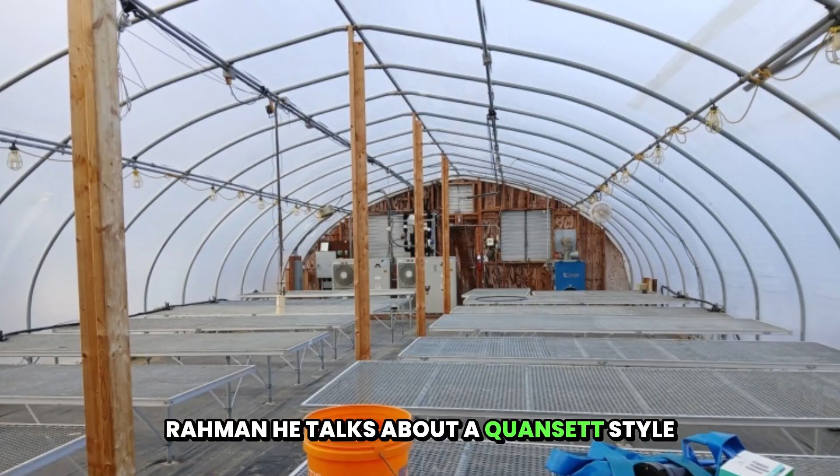In my conversation with Dr. Rahman, he talks about a Quonset-style greenhouse. He's talking about a pretty high-tech greenhouse with lots of control over the abiotic conditions, trying to maintain pretty consistent conditions, but it's a Quonset-style greenhouse, so it kind of looks like a high tunnel from the outside.

He says that he is maintaining pretty consistent temperatures for a lettuce crop, and he does talk in Celsius: 18 to 27 degrees Celsius. So here's a little memory tool for anybody who isn't used to using Celsius in their everyday life: 30s are hot, 20s are nice, 10s are cold, 0 is ice.

So if you think about that from a plant's point of view, that makes a lot of sense too, especially for a cool season crop where we're thinking about 18 to 27 degrees. That's nice, right? That's like a 70-degree day. 30s are typically too hot for these plants to grow. 10s are too cool for growth for the most part, and you will start seeing crop injury once that temperature drops below 0, once it gets too freezing.

Also want to highlight that Dr. Rahman is an engineer, so he has to do a lot of terminology code-switching when talking to plant people like us. Every once in a while he uses some terms that I, as a biologist, feel compelled to correct. But I want to give credit where credit is due—he's an engineer, he doesn't need extensive knowledge about the plants living inside of it, and most engineers don't even bother.

So we're just going to be cool about it, and I'm talking to myself here. I might flash a note on the screen when I think a clarification is necessary—specifically, he will sometimes refer to pathogenic gases when he means phytotoxic gases.

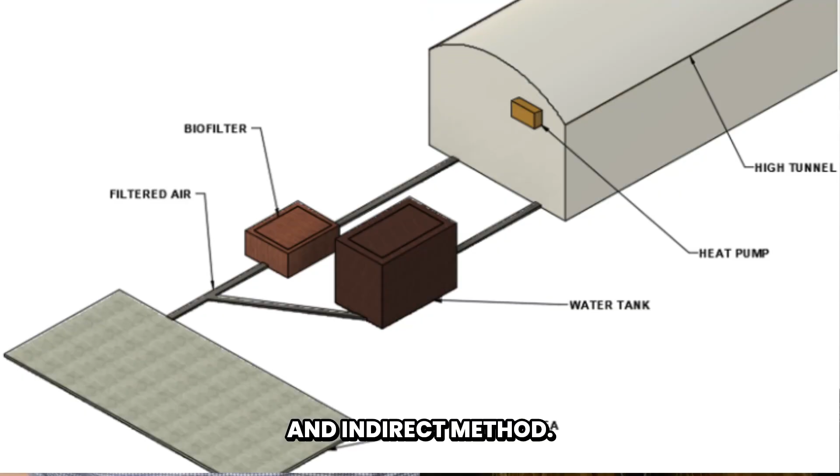Then when I and Hafizur, my student, were working together to find a way to transfer heat from that manure stockpile to the greenhouse, we were thinking of both direct and indirect methods. Fortunately, that high tunnel already has an embedded heat pump to provide indirect heat to the high tunnels from those compost bays or manure aerobic digestion systems.

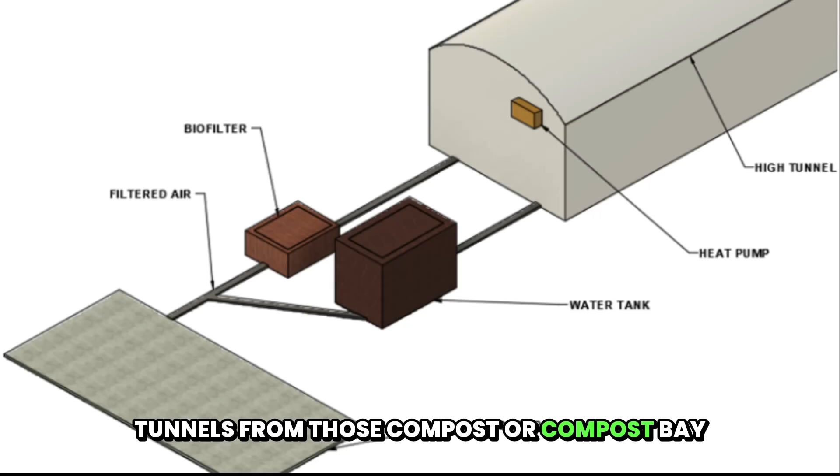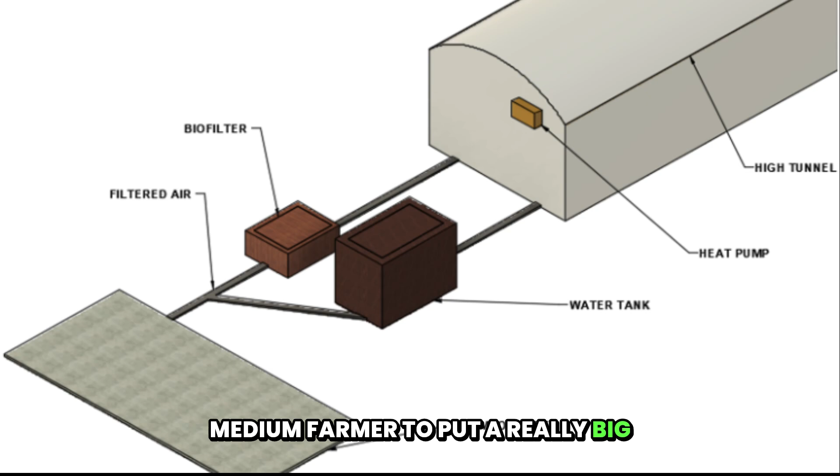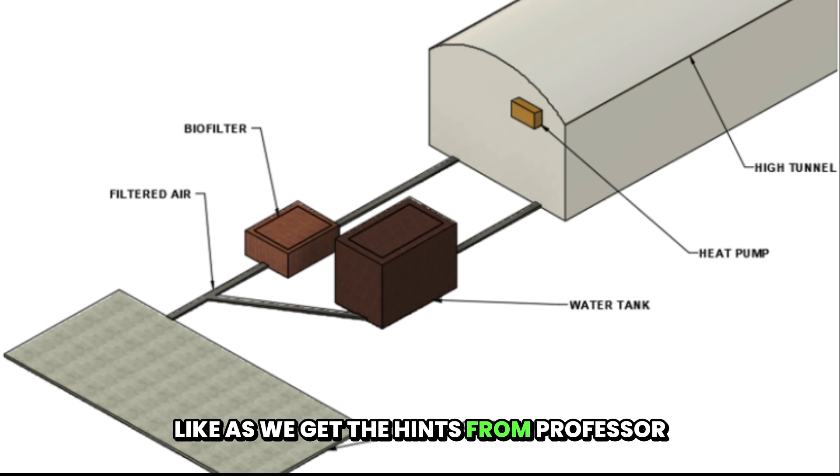On the other side, when we're thinking, well, this is not a good thing for our small and medium farmers to put a really big industrial heat pump or heat exchanger, we want to make it really low tech. So that's when we started designing the biofilter, getting hints from Professor Aber that wood chips work to reduce odor and smells. We dug more into the biofilter, and now the design is ready.

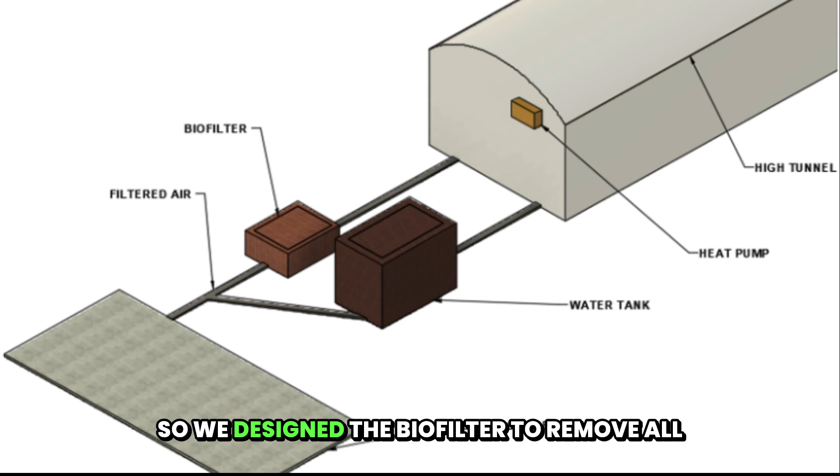We designed the biofilter to remove all the pathogenic gases and some amount of vapor, because we don't want really humid air to get directly into the greenhouse. Some of the other pathogens will be converted into regular gases. So carbon monoxide may be converted into carbon dioxide, and nitrous oxide may become NO2, nitrogen dioxide.

We designed the biofilter with three different layers. The first layer will be mixed with some manure or bioactive microbes to convert them one way or another. The other layer is wood chip and biochar blended together, with some catalytic converting material, like the catalytic converter in a car, which changes the NOx into regular gases. We don't want a high-tech system, but we use some catalytic powder in our blend of biochar and wood chip. That's the second layer.

There's a third layer of different fibers, like coconut coir and other biofibers, to reduce humidity and do more conversion of pathogen gases into regular gases. That's the plan for now. We designed it so air is uniformly distributed throughout the biofilter. We're thinking of the biofilter being 9 feet by 9 feet and 3 feet in height, and it will be fully sealed because we don't want any heat to escape in winter. We're going to utilize that heat to heat our greenhouse and hydroponic system.